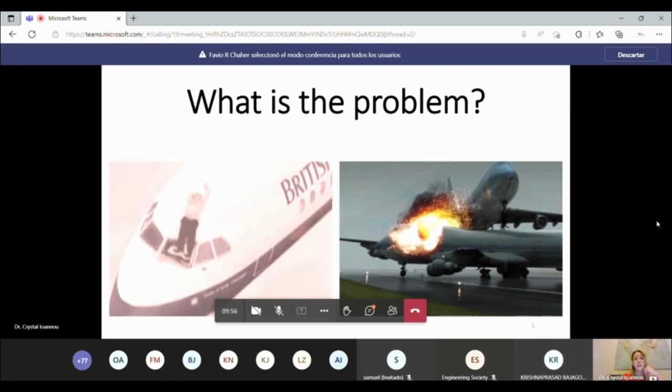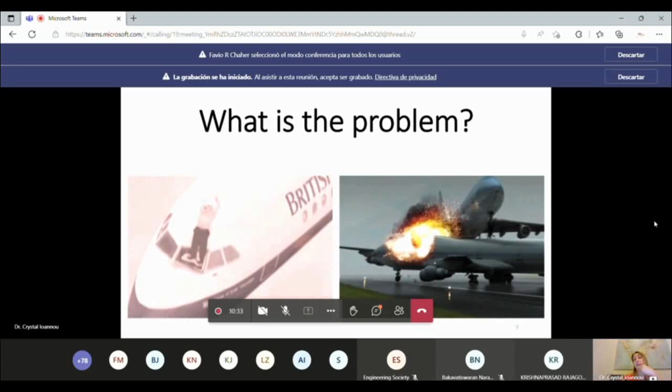And what about the second one? ATC. Was it only ATC? What do you think? It was pilot error. Overconfidence and arrogance caused the accident. I completely agree. I think we have done this in one of our classes. So what do all of these accidents, Air Ontario, BMI, BAC 111, British Airways 5390, and Tenerife, have in common? Who caused the accidents? Human error. I agree. Okay, so let's go here.

I want everyone with a phone to scan this QR code and give your opinion, and then we'll discuss the results in 2 minutes. Scan it with your phone camera, and then choose the options you like. You can choose as many options as you want, and then we can discuss. Let me prepare the results so we can see what people are saying. Okay, most people are done, I think. Let me share my screen and see what people answered.

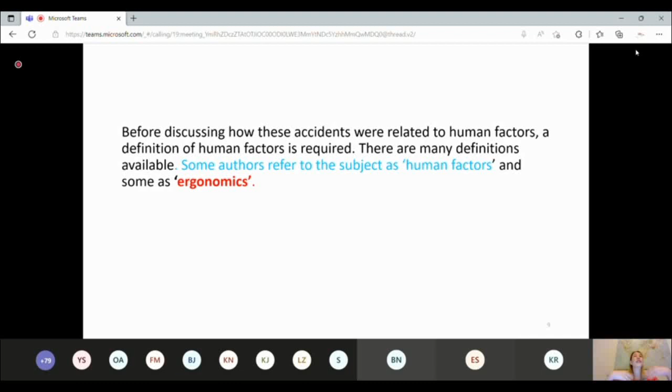So before discussing how these accidents are related to human factors, we have to give a definition of human factors. Now, some people define human factors as ergonomics. So in your opinion, have you ever heard this word before? Do you know what ergonomics is? Yes, miss. What is this? Ergonomics is, if you take it in orthopedic terms, your comfort basically. So how your body is going to be comfortable towards your posture is ergonomics. Exactly, this is exactly it.

So in ergonomics, we're taking into consideration the human measurements and the nature of people, and we design for the people because the nature of people cannot change. This is how people are. Approximately 95% of people have these dimensions, like the hands from here to here, so we have certain numbers. We're designing for the nature of people. When it comes to performance, we have certain limitations. So taking into consideration the anthropometrics, which means the human measurements, as well as the human limitations, means we're designing to accommodate people.

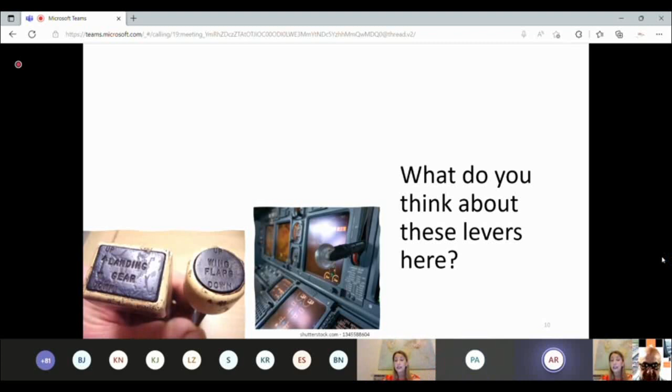Like this. And look at the flaps as well. Like, what is that? Look at the shape of the flap. It looks exactly like a wing airfoil. Exactly, it looks exactly like the flap. So what we can see nowadays in the cockpits is the evolution of this here. And how did they come up with this change here?

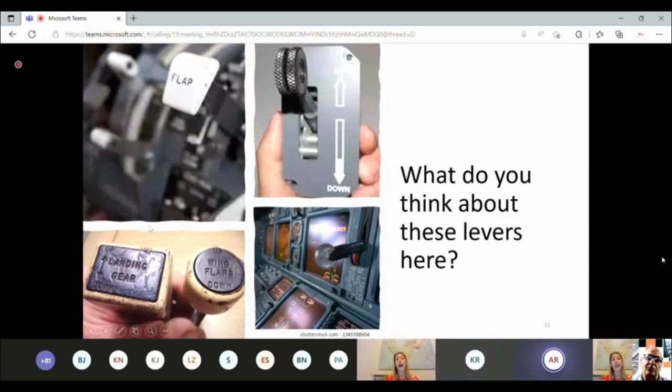And how did this start? The B-17 Flying Fortress was rushed into wartime production and went from design to an actual plane in just a year. So imagine, now it takes us at least 10 years to design the aircraft and test the aircraft before we certify it. Here they designed it and started producing it in 1 year because of the World War, in time to make a real difference to the war effort, but some strange things kept happening.

The planes kept crashing unexpectedly, usually during what would have been a routine landing. By the end of the war, there had been thousands of such crashes of this aircraft. They were generally attributed to pilot error. Wartime had necessitated quickly training a lot of new pilots. So because they were training pilots quickly and these aircraft were crashing, they were saying it's because the pilots are not trained sufficiently, and this is why we have these crashes.

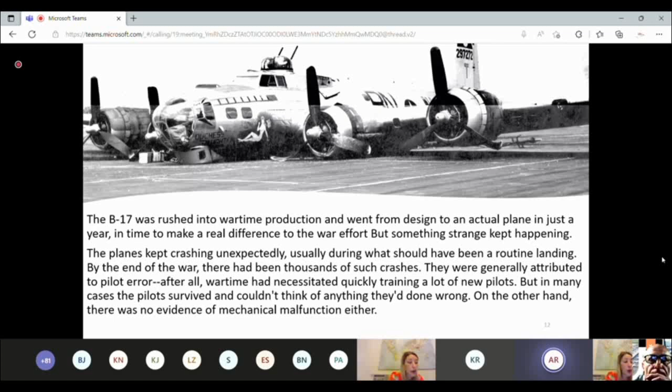But in many cases, the pilots survived and couldn't think of anything they had done wrong. When they were interviewed later in the accident investigation, they could not think of any mistakes. On the other hand, there were no issues of mechanical malfunction on the aircraft. So the accidents remained a mystery, until two psychologists, Paul Fitts and Alphonse Chapanis, tried to answer the question.

The problem was that at nighttime, when pilots were trying to land the plane and they were tired, they would go like this to pull the landing gear, and instead of pulling the landing gear, they were pulling the flaps. So instead of landing the aircraft, they were basically driving the airplane on the runway. Alphonse Chapanis realized that actually this is not a pilot error, this is a design error. He was the first one to understand that people make errors because of bad design.

And this is actually how we came up with the definition of ergonomics. Alphonse Chapanis is considered the father of ergonomics because he understood that the reason people were making errors was the bad design. According to Merriam-Webster, ergonomics is an applied science concerned with designing and arranging things people use so that people and things interact most efficiently and safely.

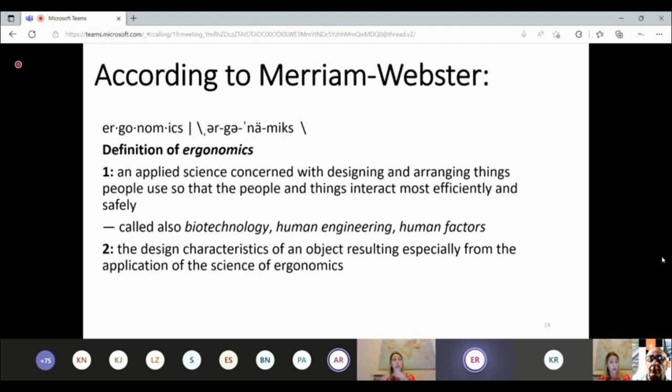It gives additional definitions here, and it says human factors. To clarify, for us in human factors, we don't consider ergonomics equal to human factors, because human factors includes other disciplines: psychology, physiology, decision-making, information processing, culture, safety culture, organizational culture. For us, ergonomics is only a part of human factors.

So here, some see human factors as a scientific discipline, and others regard it as a more general part of the human contribution to system safety. Although there are simple definitions of human factors, like fitting the man to the job and the job to the man, a good definition is the one below.

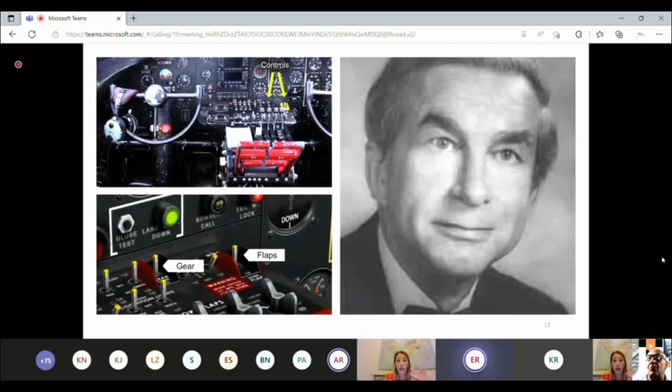So before I go to the definition, I want to comment on this sentence in red, because it says fitting the man to the job. I know that people have certain limitations. So for example, when people are flying this aircraft here, like this, at nighttime, if I don't design properly the interface, the cockpit here, it means I am actually helping them into doing an error.

So here, knowing that people have certain limitations and they can get tired, they cannot sleep properly at night, if I don't design taking into consideration these limitations that people have, it means in the end, I'm going to help them into making an error. So this is why we have to fit the man to the job. We have to design for the people, because we cannot change the nature of the people.

But as well, fitting the job to the man means that the job, the task that we're going to give to someone, has to reflect the capabilities of this person. I cannot give a fish the task to teach because it doesn't have these capabilities. So we have to give to people what they're capable of doing.

So the definition: human factors refers to the study of human capabilities and limitations in the workplace. Human factors researchers study system performance. That is the interaction of maintenance personnel, people working in aviation, the equipment they use, the written and verbal procedures, the rules they follow, and the environmental conditions of any system.

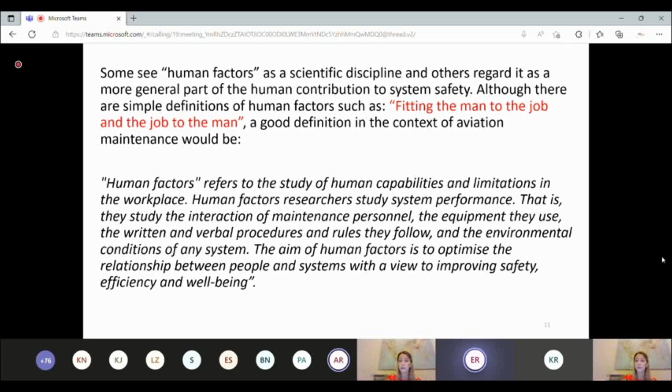So here we have the concept of safety. Within the evolution of safety and the way we started thinking of safety, we have to take into consideration human factors. So while the elimination of aircraft accidents or incidents remains the ultimate goal, it is recognized that the aviation system cannot be completely free of hazards and associated risks. Human activities or human-built systems cannot be guaranteed to be absolutely free from operational errors and their consequences.

So what we have to remember when we're trying to manage safety here is, as long as we have people involved in any activity, designing aircraft, flying aircraft, maintaining aircraft in organizations, as long as we have people involved, people will make errors. And as long as we have people here, it means that we will have accidents as well.

Now, we cannot say I will have 0% of accidents or I'm going to have 0% of errors in my organization. This is not realistic. This is not a reality. This is not going to happen. So even though people are saying we have 0% of errors, 0% of incidents, technically this is not true, because as long as you have people involved, people will make errors and you will have accidents.

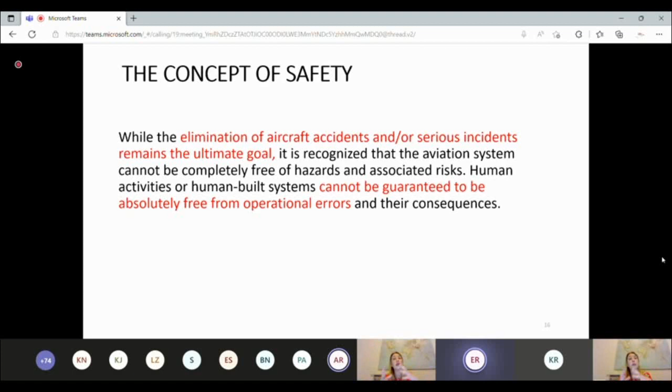We cannot accept to have 100% of errors or 100% of accidents. This is not acceptable. This is not safety. But the ultimate goal here is to address the human factors, the factors around the people, and try to minimize the number of accidents to have a number which is acceptable, as low as reasonably practicable.

So here we have the evolution of safety. This is like the history of aviation safety and how this started. We have three eras in the evolution of safety. First of all, we have the technical era, which started in the 1900s when the Wright brothers flew the first aircraft at Kitty Hawk in 1903. So the technical era, from the 1900s until the late 1960s, aviation emerged as a form of mass transportation in which identified safety deficiencies were initially related to technical factors and technological failures.

So in the beginning, when aviation started, we had aviation accidents. But these aviation accidents were usually caused by design failures and mechanical failures. It was the beginning of aviation. We did not have experience. So the focus of safety endeavors was therefore placed on the investigation and improvement of technical factors. So their goal here is to develop better aircraft and to design better aircraft.

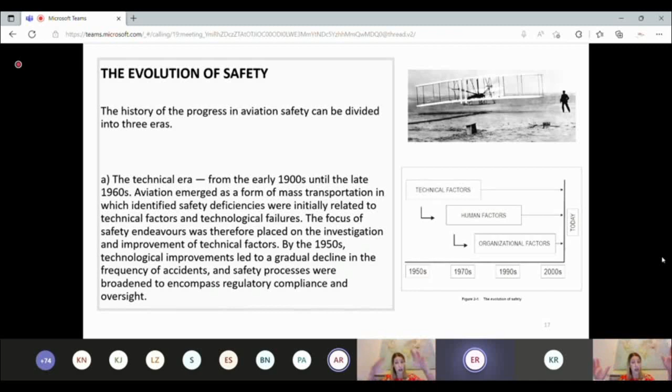By the 1950s, technological improvements led to a gradual decline in the frequency of accidents, and safety processes were broadened to encompass regulatory compliance and oversight. So by the 50s, we started to design better aircraft with some sort of automation, and we started to have some sort of regulations as well, with certain standards and authorities overseeing the organizations which design the aircraft. But still the focus was on the design of aircraft and on the mechanical features of the aircraft.

Then the next period, from the early 70s to the mid 90s. So we have the human factors era from the early 70s until the mid 1990s. In the early 70s, the frequency of aviation accidents was significantly reduced due to major technological advances and enhancements to safety regulations. So in the early 70s, we have even better aircraft with even more automation. We have enhancement and better regulations when it comes to certifying aircraft.

Aviation became a safer mode of transportation, and the focus of safety endeavors was extended to include human factors issues, including the human-machine interface. And this was the BAC 111, British Airways Flight 5390 in 1990. This is where they discovered that we design better aircraft, yet accidents continue to happen. So most probably it's not the design or mechanical failures causing the accident. Most probably it's actually people.

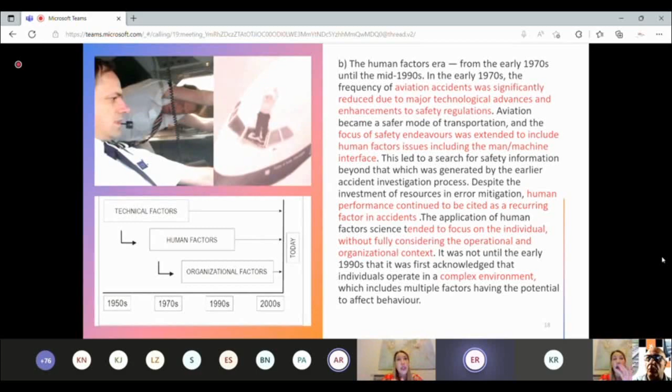Despite the investment of resources in error mitigation, human performance continued to be cited as a recurring factor in accidents. The application of human factors science tended to focus on the individual without fully considering the operational and organizational context. So in this period, we started to understand that people make mistakes.

So that the audience knows the fundamentals of the NTFA, we want to tell you that it has been created so that our future graduates and professionals who work in the aviation field today can work together on industry issues. Our aviation, from the Chicago Convention of 1944, is pronounced in its 19 annexes as a single activity involving all member countries. Beyond the problems of countries' resources and policies, aviation became a globalized industry long before the world began to talk about globalization.

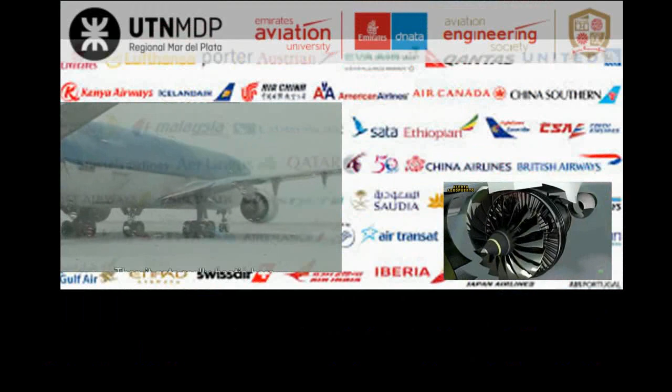But until now, in much of the world, when companies in the aeronautical sector need to incorporate new collaborators, about 95% of the personnel interviewed do not have prior aeronautical knowledge or formal education. This situation generates a real financing problem for them, since once hired they will have to instruct them in a very short time and, in some cases, this adds a collateral problem of cost and direct loss, since after the trial period, they must discard a high percentage of personnel for not having been able to adapt to the current requirements in the industry.

These two institutions that today make up the New Talent for Aviation understood the problem and have developed programs that value training and education, receiving formal university academic education, thus establishing a dialogue with your future employer using the same language. The university's aeronautical education establishes a direct link between the graduate's need for job placement with the job opportunities that the industry and the employer can provide.

The NTFA kicked off with two brilliant presentations by leading professionals from Emirates Aviation University. Aviation Industrial Studies, by the engineer Mr. Hisham Abuzala, responsible for Emirates Engineering Management of Total Product Support and Suppliers. About the systemic tools that we have in our industry aircraft, Dr. Crystal Ioannou told us about aircraft safety and regulations.

The National Technological University presentations will address the following topics. Fuel efficiency, with the contribution of engineer, captain and A320 instructor Roberto Eriksson and graduate student, captain and A320 instructor Gabriel Gator. The pandemic impact, by our graduate students, Maria Grazia, Julia, Augustina, Mirna, Egle, and Marco, accompanied by Professor Konk, gave us their vision of the impact of the pandemic in the Latin America region, but providing a solution to possible conflicts that we may have in the future in an equal or more complex situation, with the contribution of Annex 9.